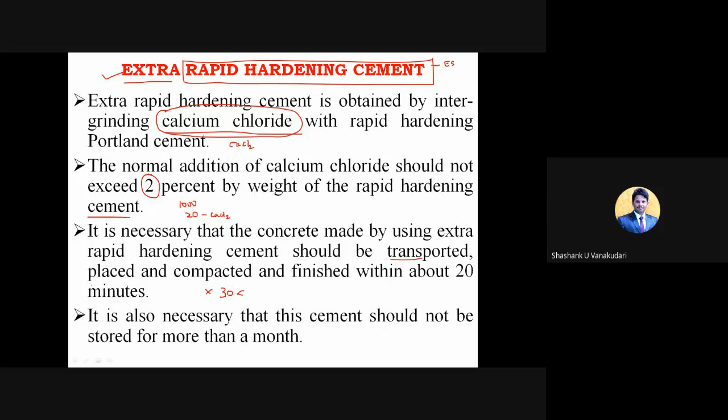And here the concrete which is made by using the extra rapid hardening cement should be transported, placed, compacted and finished within 20 minutes. Only in that case we can use this extra rapid hardening cement, because it is going to set within 20 minutes. So within that 20 minutes we need to cover all these activities: concrete should be mixed, transported, placed and then compacted without any gaps between the concrete molecules, and then finishing, in the sense leveling that particular surface of the concerned structural elements, right? All these aspects should be covered within 20 minutes.

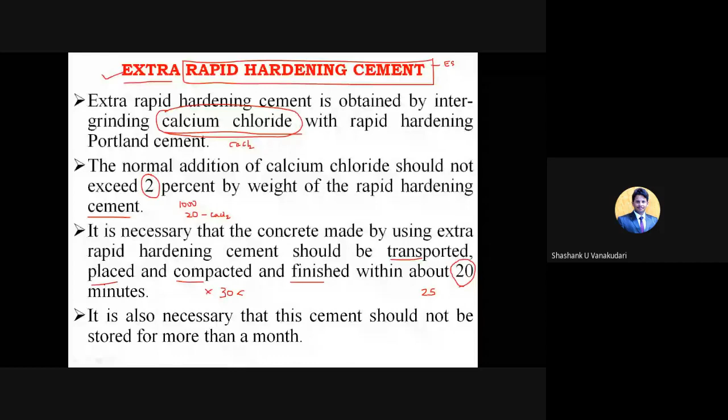Yeah. And it is also necessary that this cement should not be stored for more than 1 month. The age of this extra rapid hardening cement is only less than 30 days, not 30 minutes. After 30 days, it is going to lose its property. Once you use it in construction, the setting time may change from the given time. So this 20 minutes may reach 25 minutes, because it loses its property due to the conditions, or because it is exposed to the environment. So the age of this extra rapid hardening cement is less than 1 month.

And here extra rapid hardening cement accelerates the setting and hardening process. The usual cement and concrete takes around 40 to 50 minutes to get hardened. But once you use this extra rapid hardening cement, within 20 minutes that concrete will get hardened, and even it will get set, in the sense the hardening process.

Next, a large quantity of heat is evolved in a very short time after placing. So once the extra rapid hardening cement reacts with water, as it is going to set at the earlier time, within that time itself the concrete is going to liberate a huge amount of heat within the cement molecules.

And the acceleration of setting, hardening, as well as the evolution of this large quantity of heat in the early period of hydration makes this cement very suitable for concreting in cold weather. It depends upon the various climatic regions. We can use this extra rapid hardening cement in colder regions, in cold weather conditions; that evolution of heat within the buildings makes the concrete much stronger compared to the conventional one.

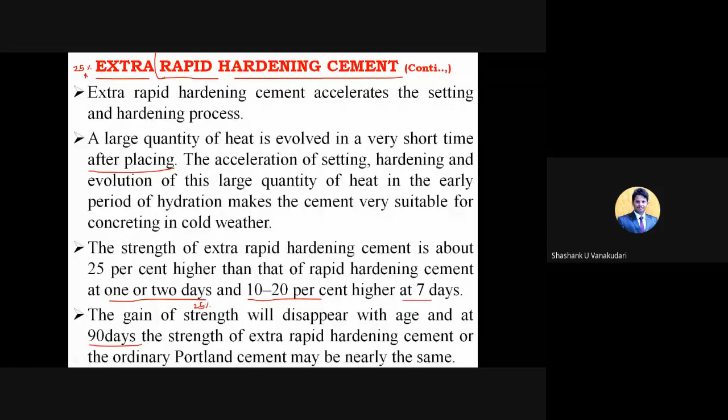Next type, that is sulfate resisting cement. Ordinary Portland cement is susceptible to the attack of sulfates. Sulfates are nothing but SO3. This SO3 may react with the water and it forms the sulfate attack, in particular the action of magnesium sulfate, MgSO4, right? And here is how the sulfate attack is caused.

The sulfates, that is SO3, react with the free calcium hydroxide. Free calcium hydroxide comes along with the CSH gel and is not at all useful. That's Ca(OH)2, calcium hydroxide, right? At the end of the flowchart, you have seen this product. So sulfates react with this calcium hydroxide to form calcium sulfate, and with the hydrate of calcium aluminate to form calcium sulfoaluminate.

The sulfates react with the calcium hydroxide and form calcium sulfate. And again, the hydrated calcium aluminate, that is C3A, tricalcium aluminate, reacts with this calcium sulfate and forms calcium sulfoaluminate. It's just the chemical reactions; just understand the basic concepts in words, no need to go into the reaction part. The volume of this is approximately 227% of the volume of the original aluminates.

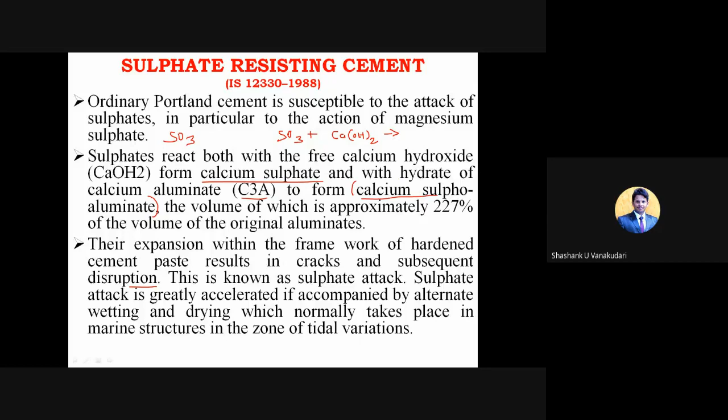To resist this, we use certain cements, which we call sulfate resisting cement. To remedy the sulfate attack, we use cement with low C3A content. Tricalcium silicate and dicalcium silicate together form around 70%. The next Bogue compound is C3A; we need to reduce it to a low percentage to resist sulfate attack. Cement with low C3A and comparatively low C4AF content is known as sulfate resisting cement.

So both these percentages should be less in that cement, then we can call it sulfate resisting cement. So if people ask you to define sulfate resisting cement, you can say that the percentage of the Bogue compounds, especially C3A and C4AF, should be lesser. So that type of cement we can call sulfate resisting cement.

In other words, this cement has a high silicate content, and the specifications generally limit the C3A content to 5%. So C3S and C2S together form 70%, right? And the remaining 30% is C3A as well as C4AF. But now the C3A has to be restricted only to...

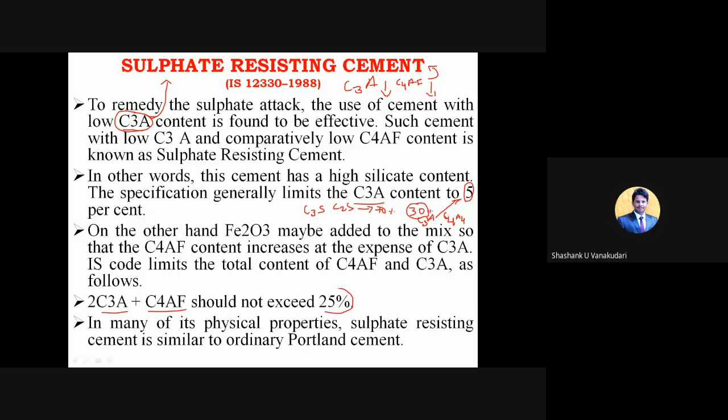So here the C3A content and C4AF content together should not be more than 25% in sulfate resisting cement. In many of its physical properties, sulfate resisting cement is similar to ordinary Portland cement. Only the percentage of C3A and C4AF should be less compared to ordinary Portland cement. Because especially C3A, tricalcium aluminate, when it reacts with the sulfate content, causes sulfate attack, right? So to overcome this, we need to reduce this content itself, so that sulfate attack may get reduced.

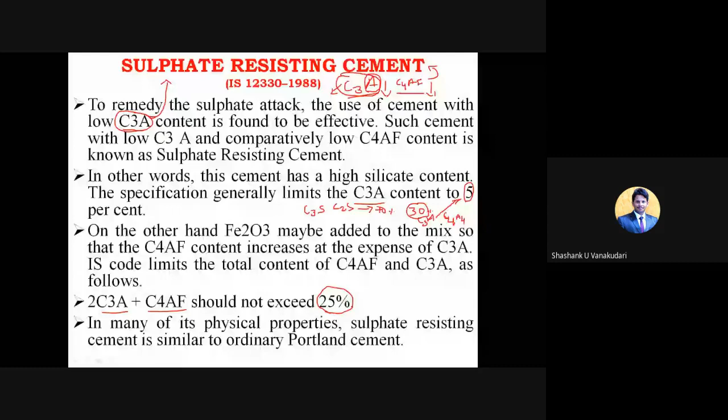The use of sulfate resisting cement is recommended under the following conditions, I mean, where exactly you need to use it. First, concrete to be used in marine conditions. There is a high content of salt, and the water continuously reacts with the cement, like in bridges, dams and all. In marine conditions, the water reacts with compounds like C3A, and there are chances of alternate wetting and drying because of high tidal variations. In those cases, we can use sulfate resisting cement.

So the reaction of water with the cement is going to be reduced there. Next, concrete to be used in foundations and basements where the soil is infested with sulfates, where the sulfate content is more in the soil sample. So on top of this soil, whatever building or structure you construct using concrete, if the soil is rich in sulfate content, then we can use sulfate resisting cement.

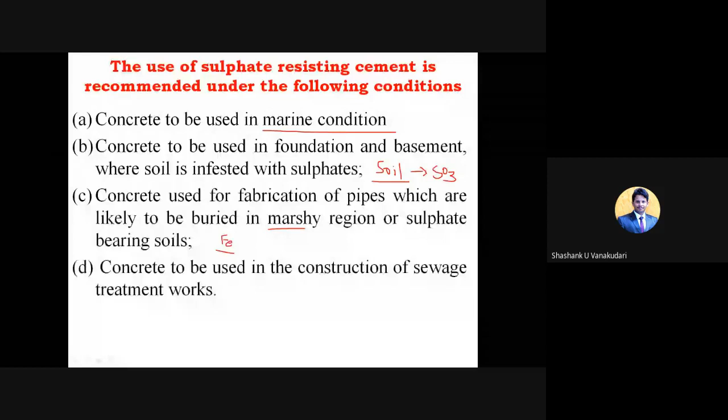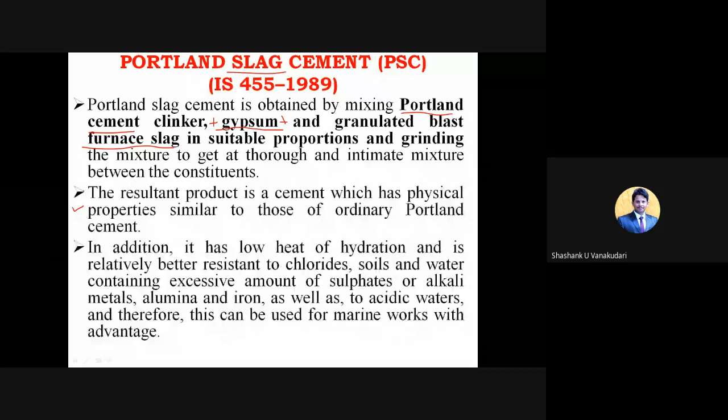To overcome chloride attack, we can use Portland slag cement, and also against water containing excessive amounts of sulfates, alkali metals, alumina and even iron. Therefore, it can be used for marine works with some advantages.

Next, quick setting cement. Do not get confused between quick setting cement and rapid hardening cement. Both are different. Quick setting is related only to the setting time. But rapid hardening cement relates to the setting time as well as gaining early strength. This cement, as the name indicates, sets very early, in less than 30 minutes. And the early setting property is brought out by reducing the gypsum content at the time of clinker grinding.

So how do you manufacture quick setting cement? In the conventional procedure of manufacturing cement, we take all the ingredients, mix, add water, send it to the rotary kiln, and get clinker. After getting the clinker, as per the standard procedure, we add around 2 to 3% of gypsum. The main reason to add gypsum is to increase the setting time. But now it has to set earlier, so that content we have to reduce. Reducing the gypsum percentage gives quick setting cement.

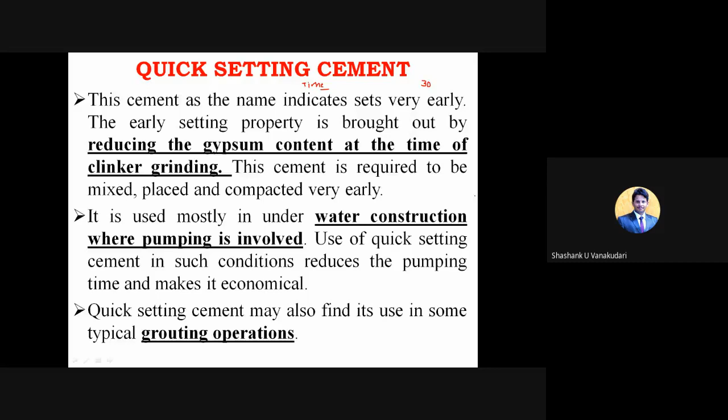Next, super sulfated cement. I think this is the last one we'll discuss, and the remaining we'll discuss in the next class. We'll complete this one and then wind up.

Can somebody please?

Yes, sir. Yes. Okay.

So, supersulfated cement. This is the next type of cement, which stands with Indian code IS 6909:1990. Supersulfated cement is manufactured by grinding together a mixture of 80 to 85% of granulated slag. In supersulfated cement, the major part is carried by this granulated slag, the waste product extracted from the industries, which takes the maximum percentage of 80 to 85%.

Then 10 to 15% of burnt gypsum. Normally gypsum is used in the manufacturing process, but in supersulfated cement they use burnt gypsum, and only 5% of Portland cement. So 5% Portland cement, 10 to 15% gypsum, and the major raw material is 80 to 85% granulated slag. That forms supersulfated cement, and the product is ground finer than Portland cement.

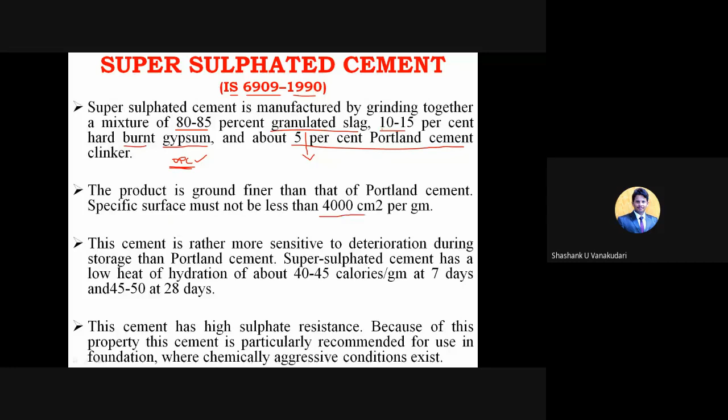Compared with normal Portland cement, that is OPC, the surface area is higher. In supersulfated cement, the product is ground finer than Portland cement. The specific surface must not be less than 4000 square centimeters per gram of cement. And this cement is rather more sensitive to deterioration during storage than Portland cement.

But supersulfated cement has a low heat of hydration, because the content of C3S and C2S is a bit less, since we use only 5% of Portland cement. The C3S content belongs only to this 5%; the remainder is granulated slag. So the heat of hydration is very low, only about 40 to 45 calories per gram at 7 days and 45 to 50 at 28 days.

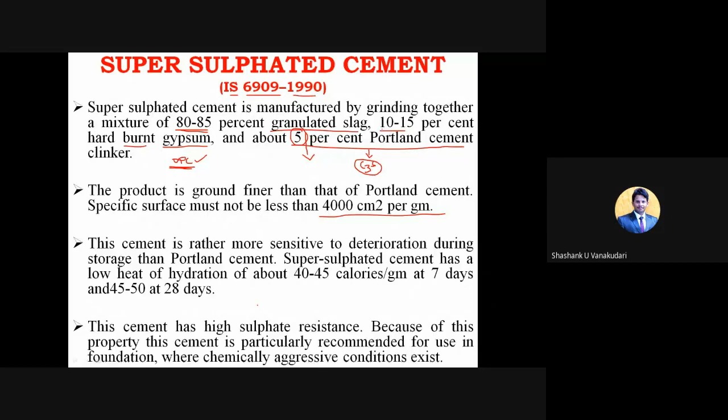This cement has high sulfate resistance, so sulfate attack can be reduced by using it. These supersulfated cements are used in foundations where chemically aggressive conditions exist, where the sulfate content is rich in the soil. To overcome a higher proportion of sulfates in the soil, we use supersulfated cement in construction.

Supersulfated cement has more resistance to attack by seawater than Portland blast furnace slag cement, and it is also used in marine works, like hydraulic structures. Other areas where supersulfated cement is recommended include the fabrication of reinforced concrete pipes likely to be buried in sulfate-bearing soils, the same as the previous type, sulfate resisting cement.

The substitution of granulated slag is responsible for the better resistance to sulfate attack. The main reason to use supersulfated cement, rich in granulated slag, is to resist sulfate attack. Supersulfated cement, like high alumina cement, combines with more water on hydration than Portland cement. So wet curing for not less than 3 days after casting is essential, as premature drying out results in an undesirable powdery surface layer.

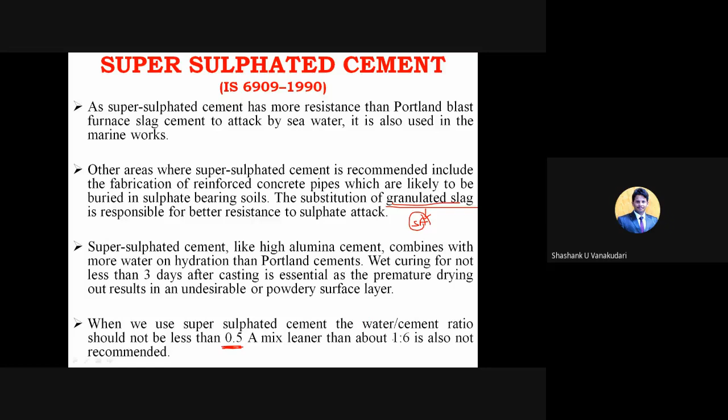When we use supersulfated cement, the water cement ratio is not less than 0.5, because we need more workability, so we require a larger water content. This is sufficient for usual concretes, but with supersulfated cement we should use a water cement ratio more than 0.5. A mix leaner than about 1:6 is also not recommended, where 1 stands for cement and 6 for sand or other ingredients. Such a sand-rich mix is not feasible with one part supersulfated cement.

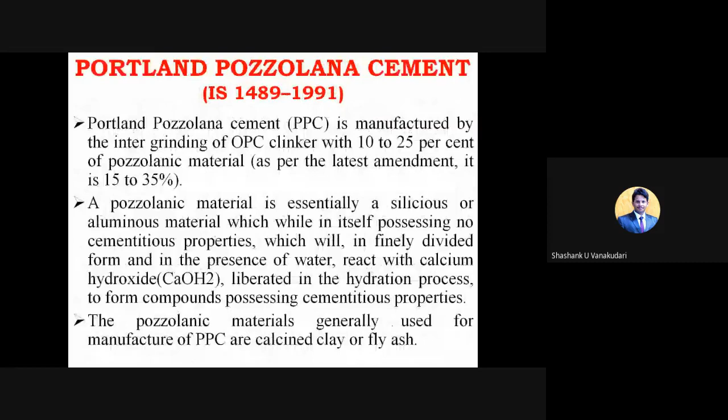So we'll wind up for today. Next class we'll start with low heat cement, then Portland pozzolana cement and other types of cements. If you have not understood any part, you can convey that to me or ask questions.